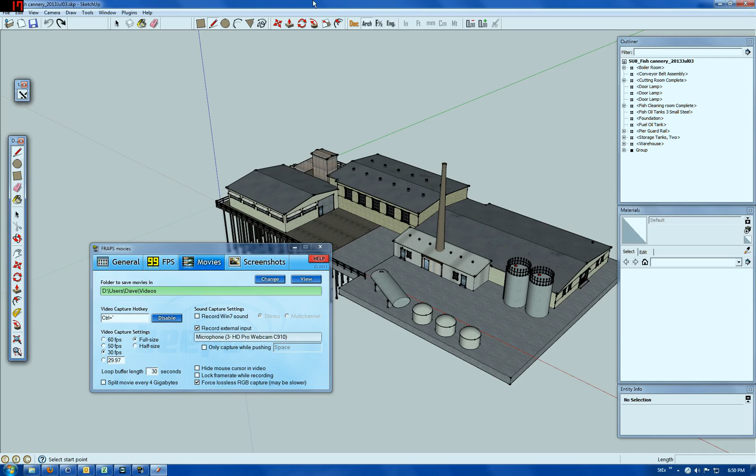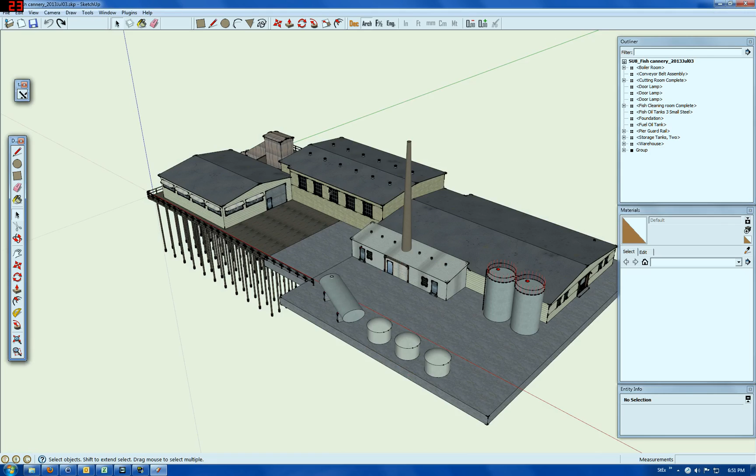Okay, here's your model, Craig. Let me get the recording software out of the way, and I'm going to change the style just so things look as I'm used to seeing them. That just changes the background color and a couple other minor things, nothing related to the model at all.

Oh, I like these, this is interesting. I remember aluminum covers like that from when I was a kid. I haven't seen those in years. Anyhow...

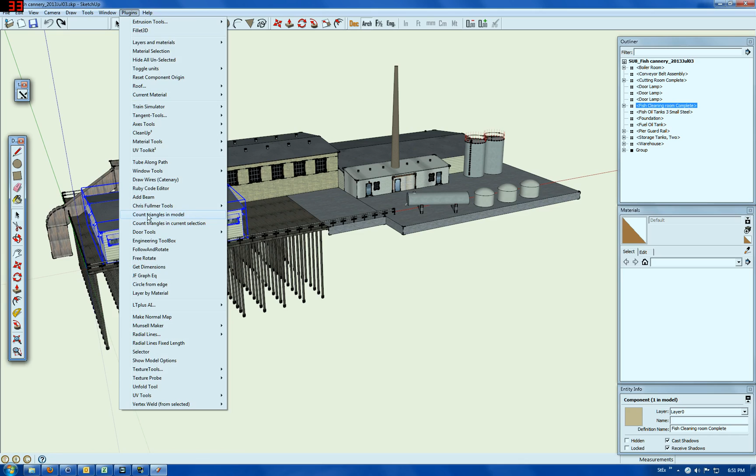What I want to do here is just a quick check of the poly count. I've got this add-on here, it says count triangles, and it comes up 26,734. That is a lot of polys.

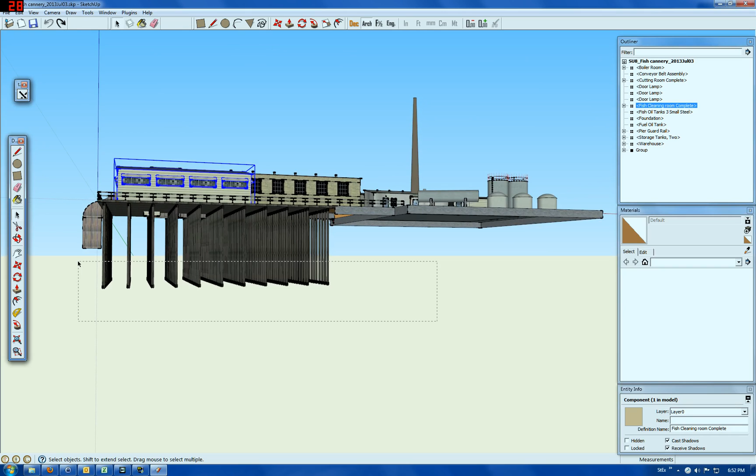This doesn't look like a model that would have that many, but wait, there are some circular things here, all this stuff down here. I'm going to check how many polys are in these things down here using count in selection. 1,200. All right, that adds up for sure.

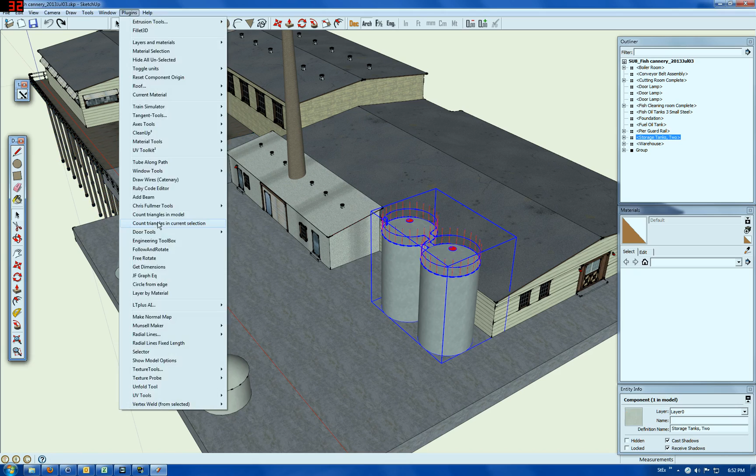What else have we got? Anything that's round is going to have a lot of polys in it. Let's take a look at this and check those. All right, right there, this is a lot of polys, especially for this, a great deal of poly. So why is this so much? Doesn't look like it should be so much.

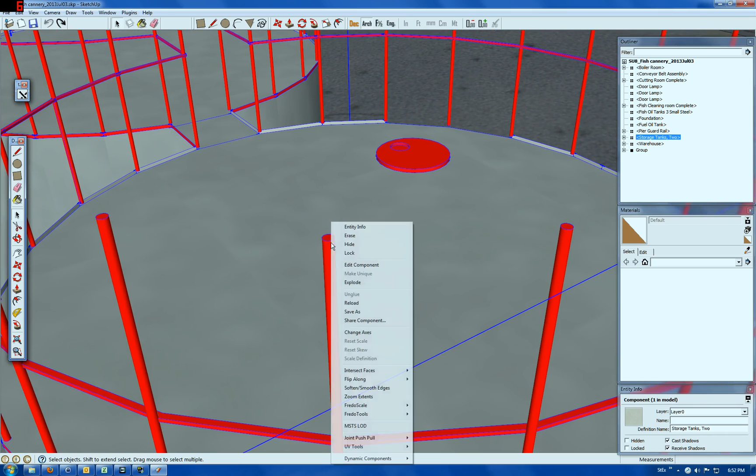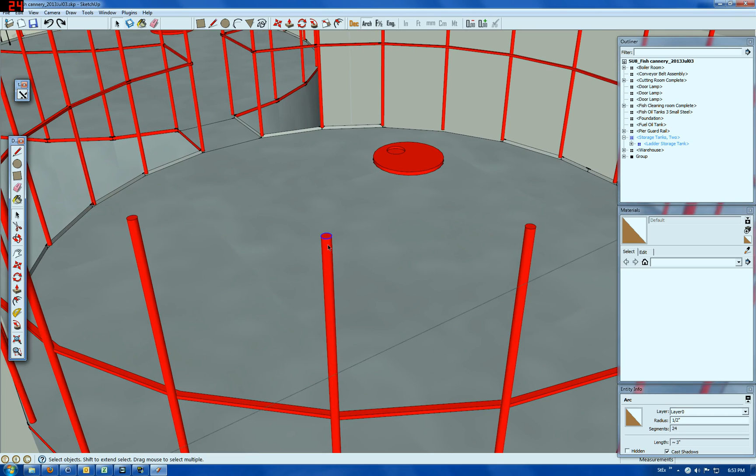Ah, okay, it's this red stuff. That has 24 segments in it. So each one of these guard things on here, I suppose, is what you're trying to represent. Each one of these is going to have the tall portion with 48 polys on it, and the circular portion, just the cap itself, is going to be about 22.

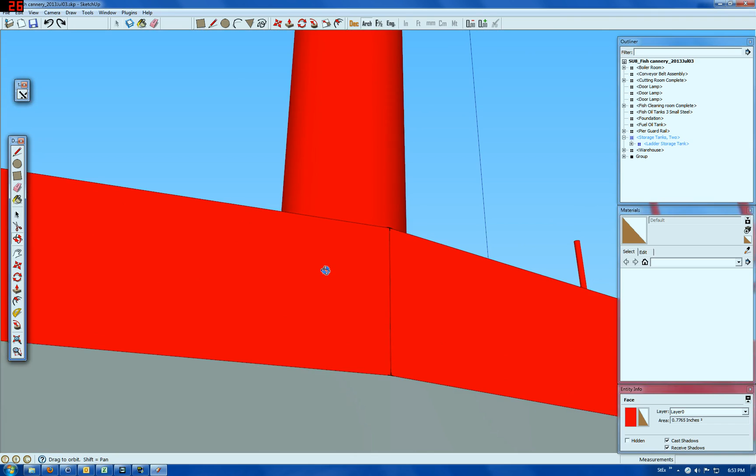Is there a duplicate? We have the same thing underneath hiding. Sometimes we've got things down here that stick around even though we don't really want them. Yes, we've got one on the bottom also. So we've got 24 on the top and bottom, and another 48 on the vertical. So what are we talking about? About 72 or something times 24 times 48, 72 times 48.

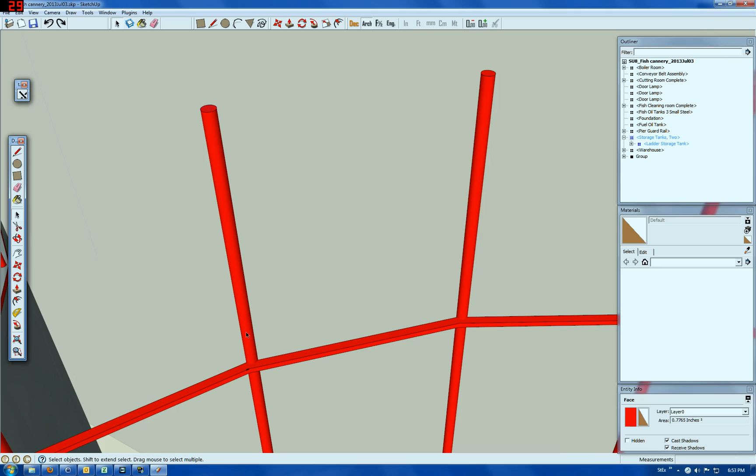Well, that's a lot. So right there, this is something that will need to be changed. If we keep this as a safety feature, which makes sense, it probably could be reduced to rectangles instead of a smooth circular surface, and vastly reduce the poly count.

Tanks like this, what do we got here? 24? Yeah, we have 24 on that. Tanks like this, sometimes, especially when they get a very large radius, the number of segments has to be large. As something gets smaller, it's possible to have fewer segments and still have it look visually correct.

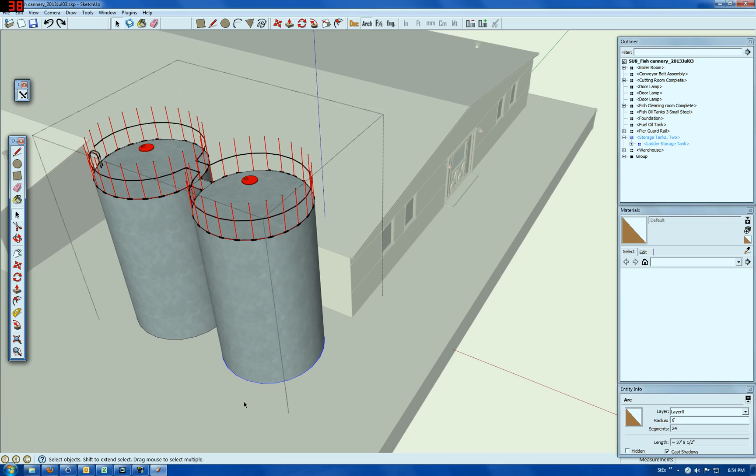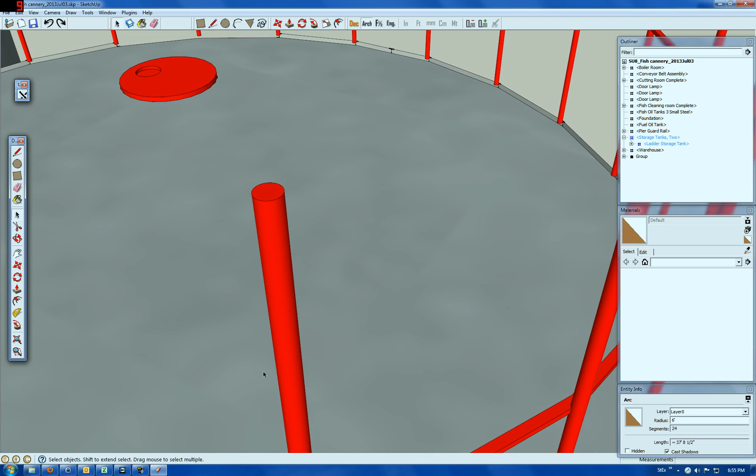So, for instance, these things I spoke of already, what are they? One inch across. Yeah, these could very easily be square or rectangular rather, and you wouldn't notice it unless you were right on top of it.

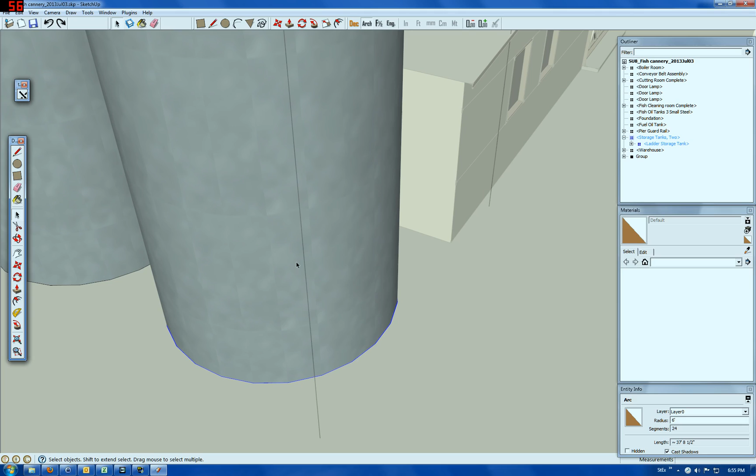The larger tank, on the other hand, has to have a number of segments so that the distance each segment represents looks right given its size. Each of these segments is about 18 inches, so it makes sense to have more segments there. I don't know that 24 is the right number, but it makes sense to have more.

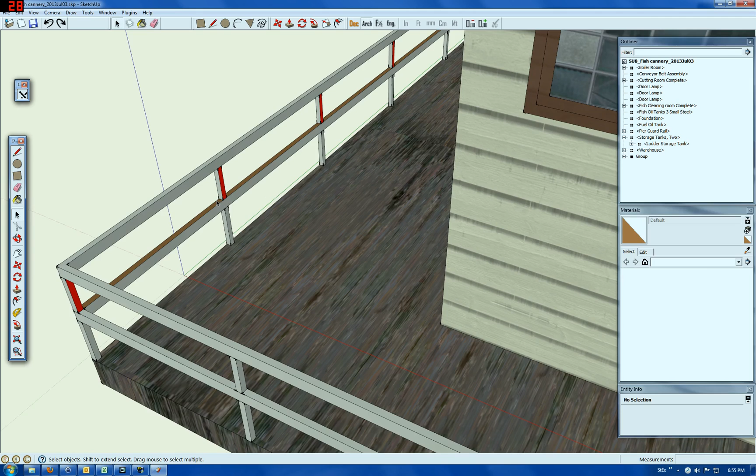But still, there's probably something else going on here that's got a high poly count in it. Let's see if we can find it. And yep, right here. Okay. So what do we got here? We have a guardrail with stanchions. Okay, what is this right here? This is a catwalk stanchion, and I'm going to copy one of these to some other location.

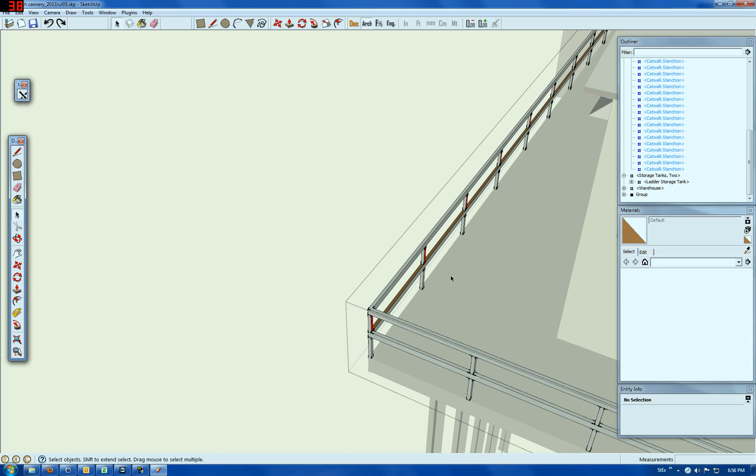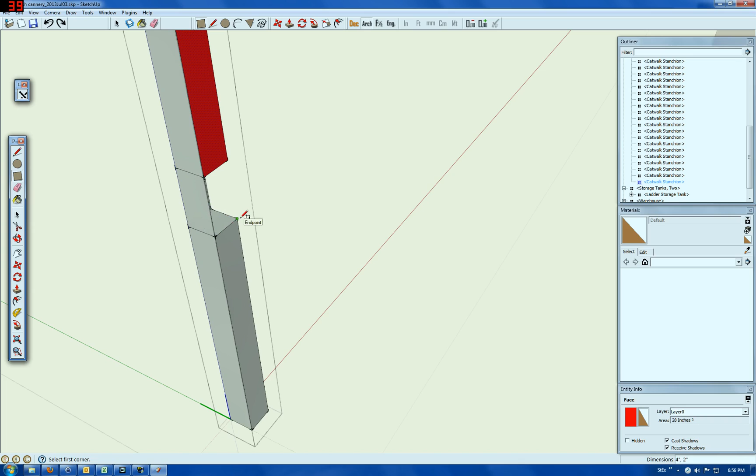Do Control C, Control V. Okay, so here's an opportunity where a little bit of cleanup pays off. What I'm going to do here is remove that gap so that, like if we look at this face, there's 2 polys there, and we look at that face there, there's 2 more polys. So each of these verticals has 4 polys instead of 2, and this is a simple thing to clean up if we just get rid of this middle section that has the gap in it.

Whoops, I've lost it. Where'd it go? Here we go.

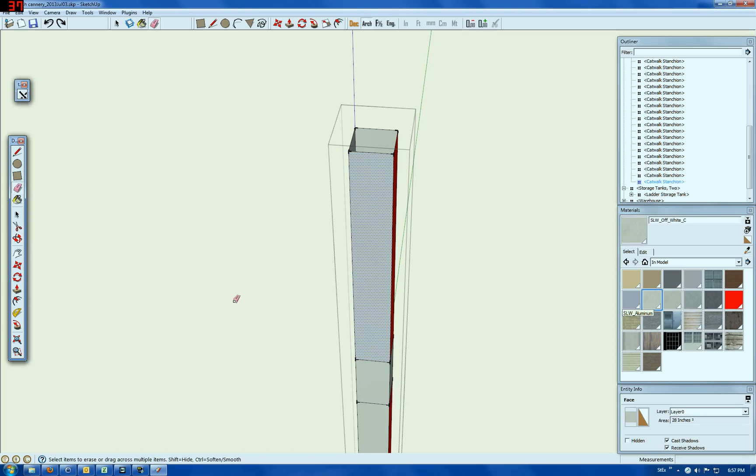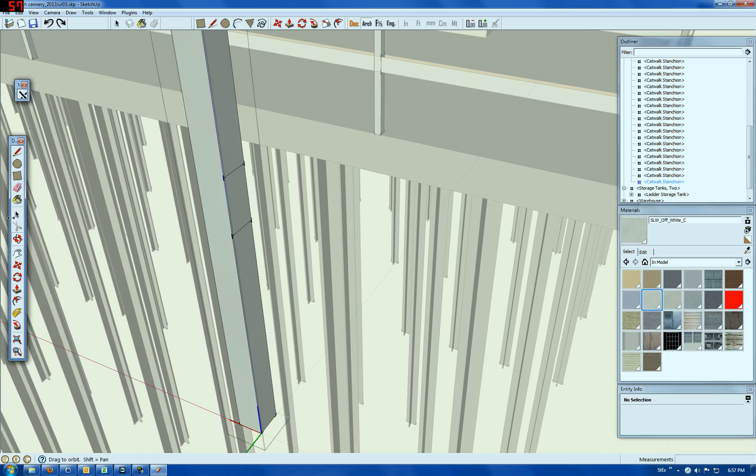Let's texture these things. Get rid of that. Texture this, texture that, here, and here. So when we started, there's nothing on the top, there's probably nothing on the bottom. I'm going to take a peek through. No, nothing on the... well, what is that down there?

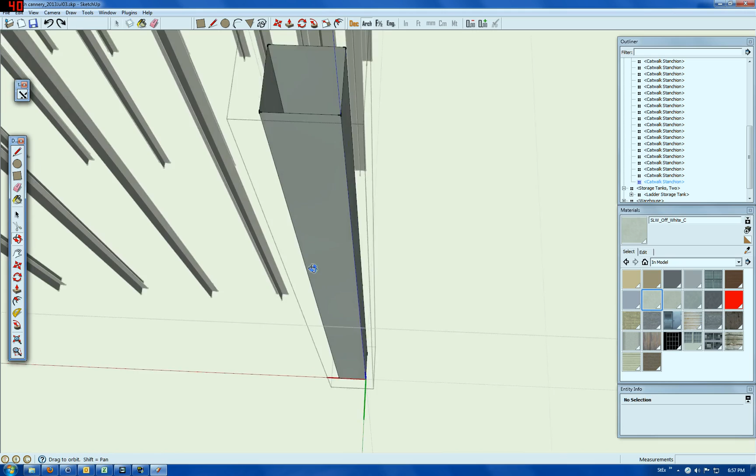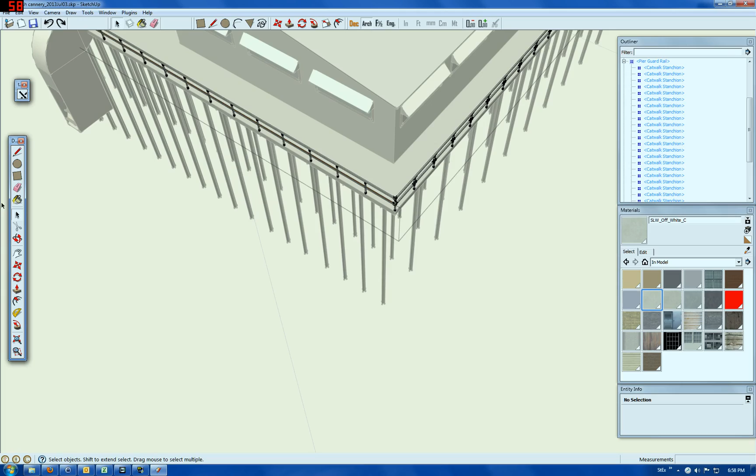There is a face down there, let's get rid of that face. Okay, so what we started off with was something that had 16, 18 faces, 18 polys on it. We're now down to 2, 4, 6, we're now down to 8 instead of 18, so we reduced this by a count of 10. And given that there are lots of them, a whole bunch of them right there, 10 times however many there are, it adds up.